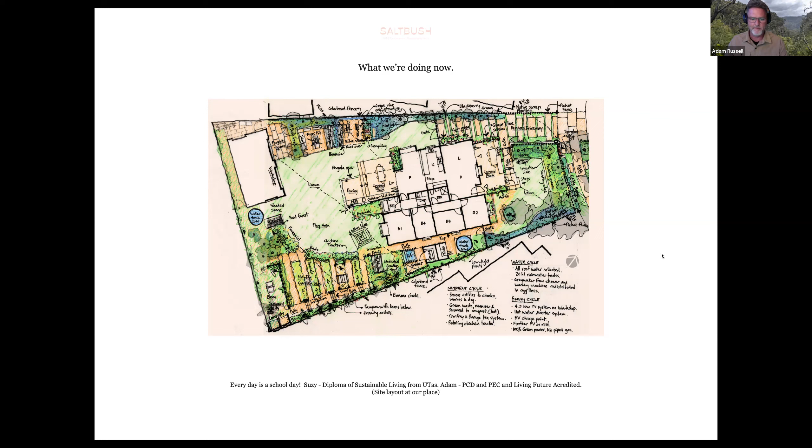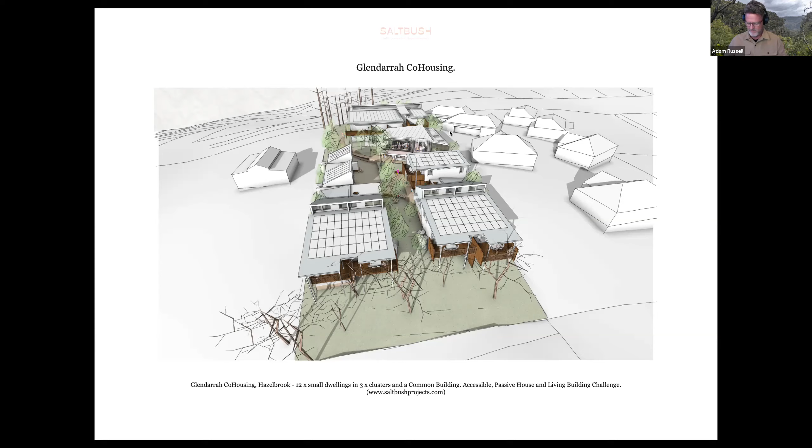This is a view from the street side from the south. So entry here.

I'll quickly talk you through the site organisation and layout and some of the logic behind it. Then I'm going to go through how the Living Building Challenge has informed some of these decisions and the overlays of how the Living Building Challenge might play out.

So we kept an existing driveway through here rather than recontouring the site for bicycles, vehicles and pedestrians. And that is a nice arc that brings you to the common building located in the centre of the site with a northeast aspect that picks up on some good views to bushland and the big smoke, as we like to call it.

Council are imposing 15 vehicle spaces on us, and we're trying to provide them in numerous different ways so that the spaces they occupy can be adapted by residents down the track for other uses. So there's a double lock-up garage here that could become an exhibition space or creative space.

There's a small, it's not a basement, but parking area that's encaptured within the ground floor of Group 1 buildings. And then there's some hard stand parking at the back here, which will be porous paved and has potential for some garage and carport structures that can be used for other uses down the track.

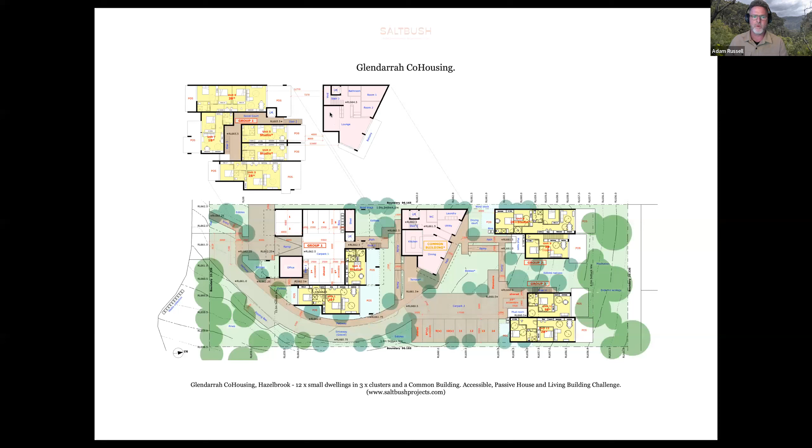And the common building has 2 small rooms that could be used by occasional guests or living carers now and then, as agreed to by the community. There's a commercial kitchen downstairs and a dining space, a shared laundry, and upstairs there's a large lounge that's sort of in 2 parts with a quiet room and a room with the view.

Then on the right-hand side here is a very brief summary of the requirements of the Living Building Challenge that we're attempting to meet. I think on reflection, the Living Building Challenge is really well suited to large corporate, commercial or institutional clients that have a budget. They have a lot of buildings each decade, and they have a budget to make one of them exemplary. It's quite expensive and involved for a smaller project like this to get full certification.

However, the intentions and ambitions behind it have been an amazing template for us to follow.

And if we get 3/4 baked rather than fully cooked, I'm pretty happy with that. We certainly won't be half baked.

Under the place petal, we need to provide an ecologically positive landscape that has a relationship with the surrounding landscape and ecology. We need to offer sunny spaces for growing healthy food, which we do through the heart here. We need to preserve or offset habitat equal to the project area. We've got about 1/5 of the site which will be original habitat, and then we're going to regenerate some at the street frontage, with an offset making a financial contribution to habitat regeneration elsewhere. A reduction of fossil fuel use and occupant evaluations after 1 year of occupancy regarding quality of daylight, air quality,

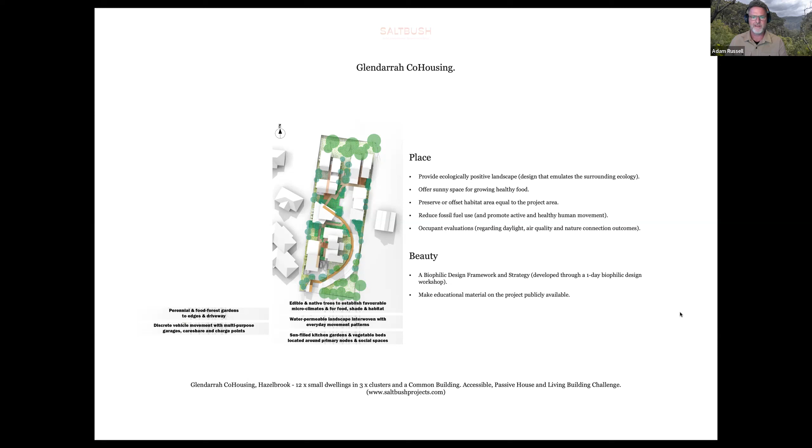Under water, there'll be no potable water used for irrigation, so irrigation will be rainwater and grey water. General water use should be less than the baseline consumption for this type of housing in this region, and 100% of water used on site must come from rainfall and closed loop systems. So the intention is to try and close the water loop.

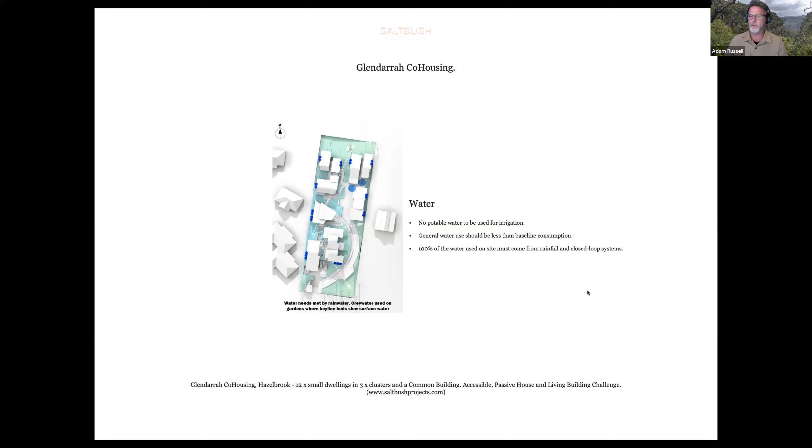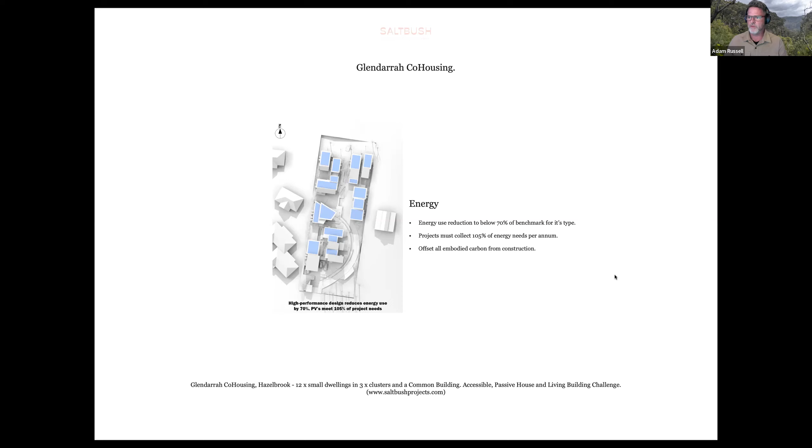Same sort of thing with energy, aiming for below 70% of the benchmark for this type of housing, intending to collect 105% of energy needs per annum, averaged across winter and summer, and to offset all embodied carbon from construction. These are the full Living Building Challenge certification ambitions, or imperatives. We may not be able to achieve some of them, but at the moment we're entertaining most of them.

Health and happiness: minimum indoor air qualities to maintain, minimizing of VOCs, using safe cleaning products and so on. All of these need to be documented in an operational manual under the agreement of the co-housing tenants. Direct connections with nature, which we don't struggle with in the Blue Mountains.

Occupant evaluations. Then under materials, it's very onerous and very expensive to achieve full sign-off on. But the intention, if you were to, would be to use renewable materials wherever possible, or at least salvage or retain structures that are there for reuse.

Avoid red listed chemicals in at least 90% of new materials—sometimes hard to do with things like heat exchange units or heat pumps. Source materials from transparent and responsible suppliers, support local economies, minimize transport energy, and minimize waste at all stages.

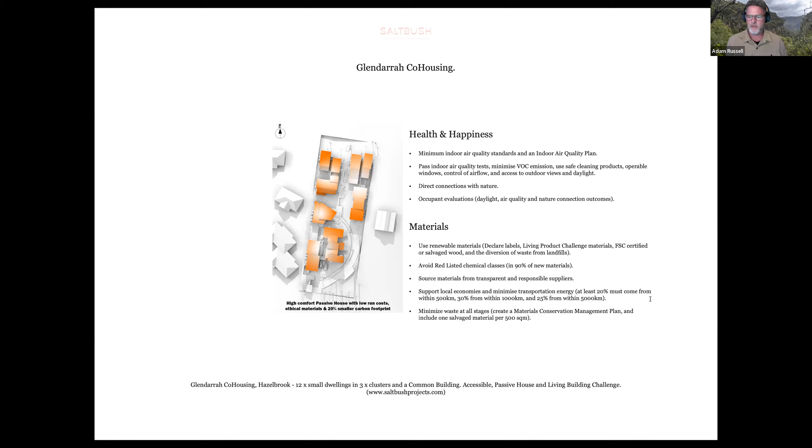So you can see here a lot of these imperatives are not so much about the thermal performance of the built envelope, but they're community and socially oriented intents.

Equity: the project must be accessible for all members of the public. We have a 3-story fall on our site, and that's been quite a challenge to get stair-free access from the street to the common building and to all 3 clusters of housing, but we've achieved it, and we're happy about that.

Then there's also an imperative to support minority and disadvantaged groups. So when we're specifying materials or tradespeople, we make record of whether they're minority or disadvantaged groups and try and include those groups.

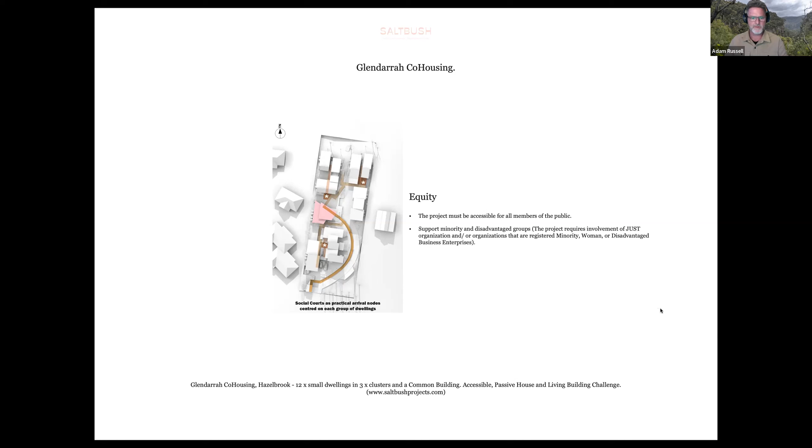Hey Adam, I hate to interrupt, but I'm just letting you know that time is sort of up. Oh, is it? Okay. All right, yeah, this is my second last slide, I think. That's okay. Do you want me to stop right there, or 30 seconds? Never—I like people to finish.

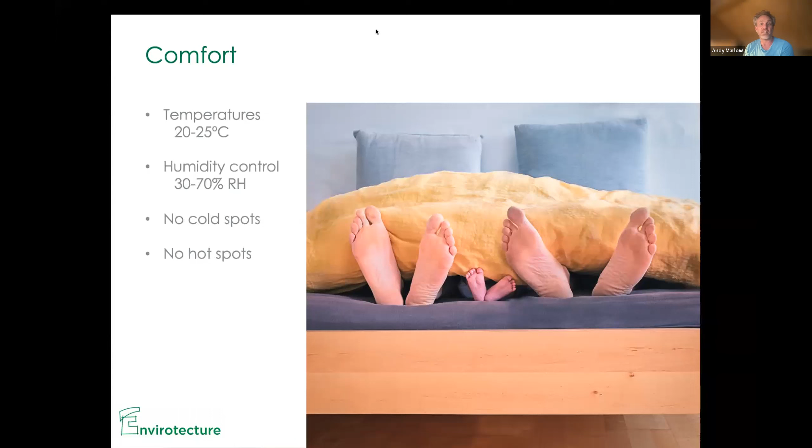This obviously isn't always, and is certainly not the experience of pretty much every Australian home anyone has ever been in or lived in. So it's really, really important. Why is it important? It's actually important because you can't be healthy if you're not comfortable. So these things go hand in hand.

How do we achieve health in a building? Well, firstly, we have comfortable temperatures. And then secondly, we need healthy indoor air. In passive house buildings, we achieve that by having 100% fresh air.

So we have mechanical ventilation. It's supplied 24/7. To be blunt, it's a fairly simple box that has two fans inside it. One of them puts air into the house, one of them takes air out of the house. And those two air streams pass each other, transmit the heat energy from one to the other, but they don't mix.

So it dumps the moisture from your bathroom outside, it dumps your greasy cooking stuff from inside to outside, and brings in air from outside, which we call filtered. We don't use the word fresh because it depends where you live. If you live where Adam lives, probably pretty fresh. If you live on Parramatta Road in Sydney, or whatever the equivalents are in the other capital cities, opening a window is not a guarantee of fresh air. It's just outdoor air. These units have really good filters.

They're also very good in a bushfire. So there's some great data about why you want one of these devices if you're going to sit through a bushfire, like we did two years ago. The supply of filtered air also allows humidity to be controlled, and that is how we prevent condensation and prevent mold and all of the issues that flow on from that.

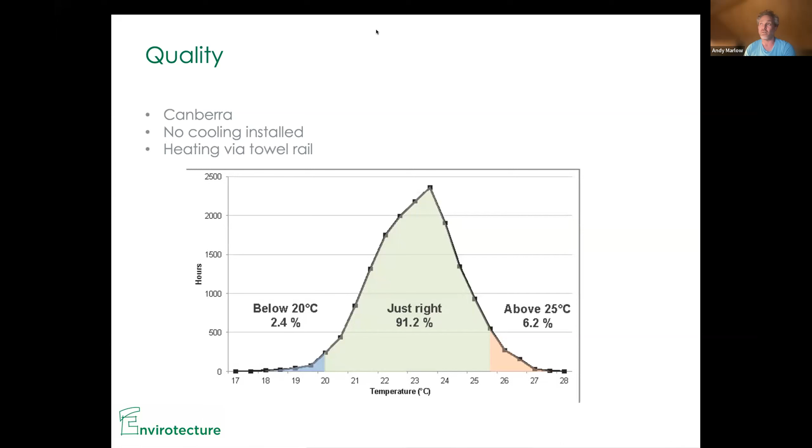He's got no cooling in that house, which is pretty impressive in Canberra, and he really does heat the house with a towel rail, and he can actually overheat his house if he leaves the towel rail on for too long. So it's not so much about the no cooling part, because I'm going to contradict that later on, but it's really about the reliability and the optimization you can achieve in these buildings to deliver them really efficiently and effectively to achieve the results that you want. I'll talk in a minute about why that's really important.

So, here we go, this is why it's important. So, are they sustainable? Well, who the hell knows? Is building a new house sustainable at all? Adam had a slide which had the image of the size of the house and the garden at the bottom. If you're going to spend the time in the garden, do you really need a big house? Do you really need a house at all? Maybe a small shed would be adequate. There's all those aspects to this.

But if we are going to build houses, let's just assume that that's the case, then we really, really need guaranteed performance. Because if as a nation and a planet we're going to meet our carbon emissions reduction goals, we need to know what they're going to be. And if we can't predict what our buildings are going to do, then we're stuffed. If you're going to have a plus minus of 20, 30, 40, 50, 60, 70, 80%, then obviously any calculations you base anything on are going to be wrong, and they're going to be really wrong. So you need the guarantee that it's going to do what it says.

These buildings, as I will explain shortly, are very airtight. This is very good, because it means that they don't change very quickly. So when it gets hot outside, it takes them a long time to heat up. And conversely, when they get cold, it takes a long time to cool down. So this is exceptionally good in extreme weather events.

There were some wonderful yet terrible examples in Texas a couple of years ago. There was a couple of people living in a passive house basically tweeting about how they were going. And they lasted several days before they had to leave with no power. It was, I forget how sub-zero, but cold. So the resilience in these buildings is great. Increasing climate shocks, that's incredibly important. And especially as the grid is normally the first thing to fail, then it's really, really significant.

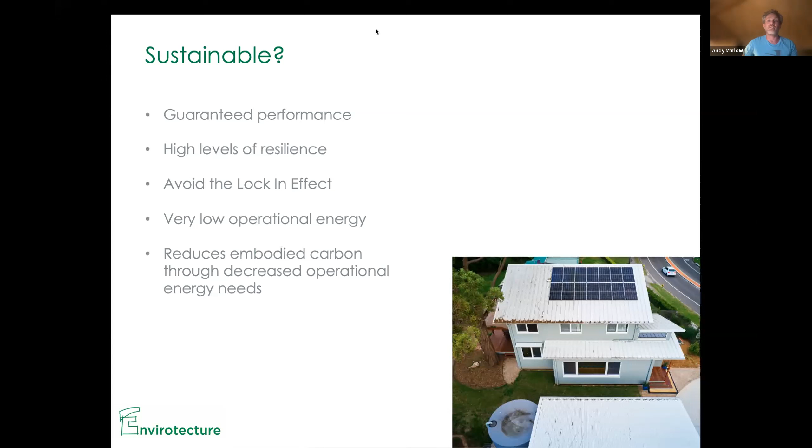So that's my big ranty bit. Now, in possibly the wrong order, I'm going to quickly talk about what is passive house, mindful of the time and trying to get to the discussion part, which is always my favorite bit. So 'Haus', not house - basically the origins of the word come from German, and it actually means building, not just house. So it can be anything of any size.

How do we do it? This is the simplification of the entire system to one slide. There's 5 key components. They're not particularly difficult.

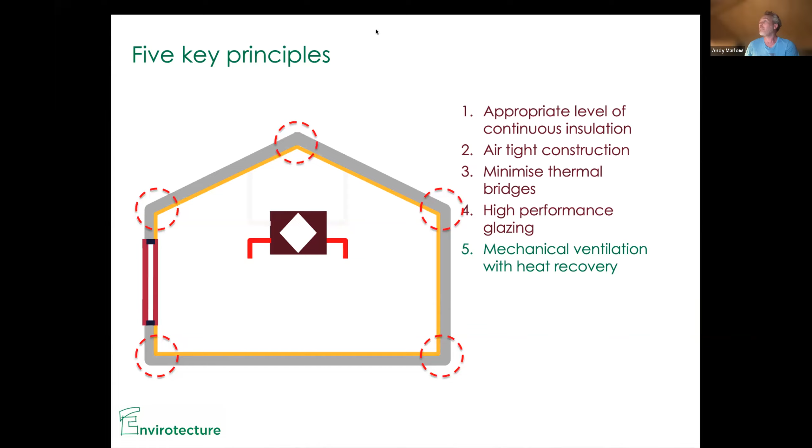So that's the short version, as short as I can ever be. And they're probably my key things that I want to have a bit of debate about, really.

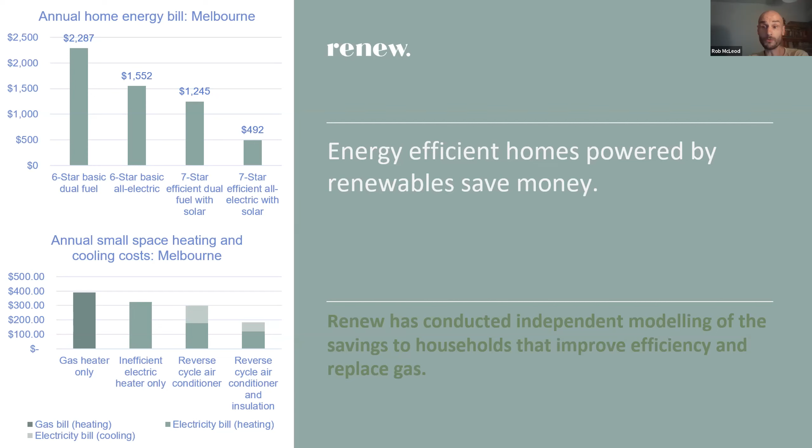Compare that to a dual fuel 6-star home with no solar. For existing homes, smaller homes, potentially rental homes, potentially apartments, even heating and cooling a small space, energy efficiency and your choice of how you do it using efficient electric appliances makes a critical difference. So it's cheaper to heat and cool your home using a reverse cycle air conditioner than it is to just heat your home using a gas heater in a city like Melbourne and swelter through summer. You're significantly better off if you've also got insulation and better energy efficiency, of course, and there's all of these other benefits to that.

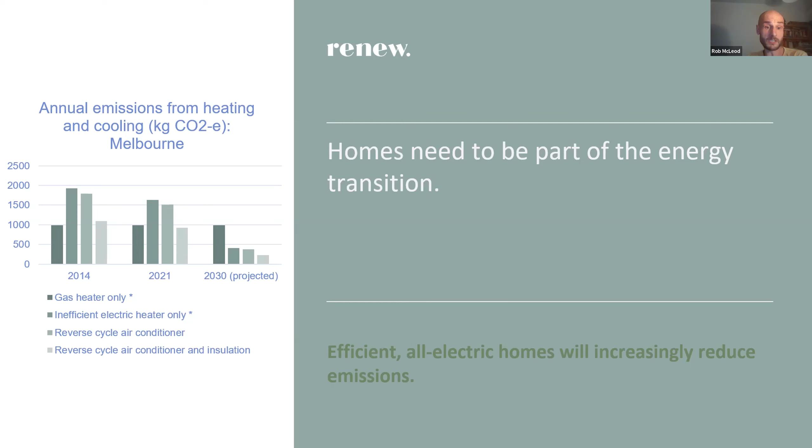We also know this has to be part of the energy transition. As the broader grid shifts from coal and fossil fuels onto renewables, the benefits of electrification really start to add up when it comes to emissions. So in 2014, you would actually be emitting more by switching to a reverse cycle aircon to heat your home instead of gas in Victoria, even if you insulated your home. By 2030, it'll be a small fraction of that, and you're already saving emissions now if you make your home more efficient. These figures include heating and cooling for the reverse cycle air conditioner use, so you're reducing your emissions even if you're cooling. There are other things you can do to cool your home and other design principles we should be bringing into play, but this gives you a sense of why this will matter for a lot of people.

There's a critical problem though, and that's that there are some really strong barriers that mean rental homes in particular, and the homes of people who are on low incomes, are performing worse right now than even your standard owner-occupied homes. Not even looking at homes that qualify for passive house or using best design principles, just standard existing homes. About 30% of Australian homes altogether have rooftop solar, but for rental homes it's about 5%.

There was a study that came out this year showing that even in a like-for-like home, controlling for all the other variables, a home that is otherwise identical but is lived in by a renter will have an 8% higher energy bill than an owner-occupied home, because the energy efficiency tends to be worse. Just on that one reason alone.

Compare that to where so many homes are at the moment. Better Renting, a national organisation mostly based out of the ACT, recruited a big cohort of renters to install heat trackers in their homes over the course of this winter. They found in the course of this study that...

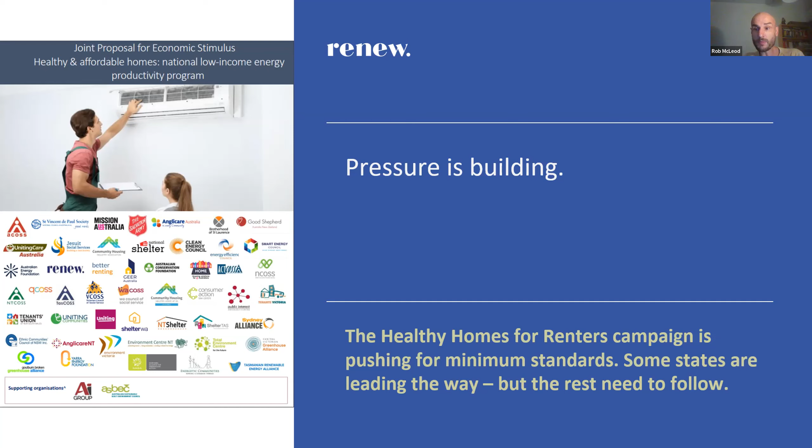Shout out to Energetic Communities in Queensland, kicking off the Healthy Homes for All campaign in Queensland to introduce minimum standards there, as well as a broader national campaign called Healthy Homes for Renters, which we're really involved with. I think that's probably about all the time I should carry on for, so I will leave it there.